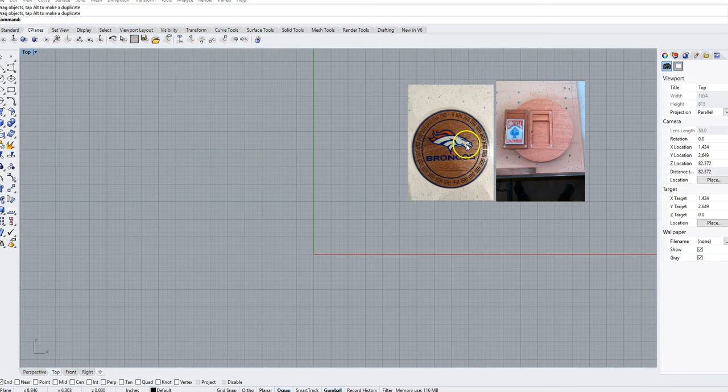Okay, cribbage board set up here. This is what we're going for. We want a diameter across the whole thing of 12 inches.

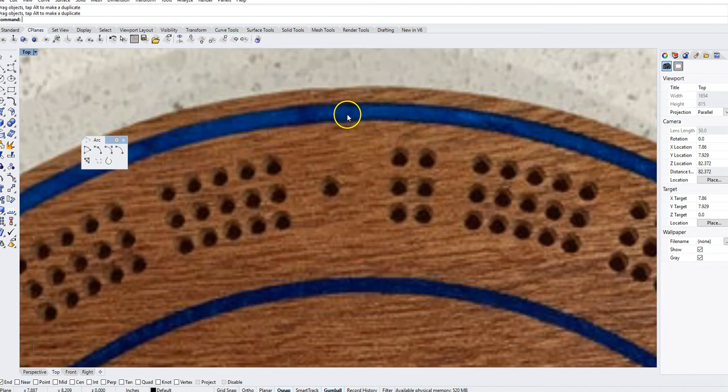As you zoom into this border here, we want to put about 3/8 of an inch, or 0.375 inches, between the edge and this first groove right there. We're going to make this groove a 1/4 inch. Then we're going to make from here to here 2 inches, and then another 1/4 inch. That will leave us the inside to do our design.

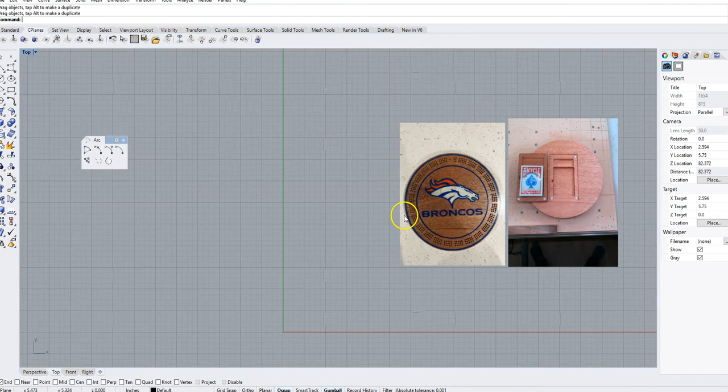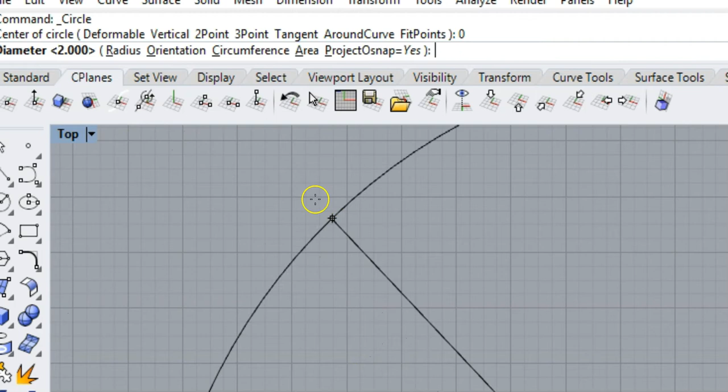So we're going to start with the outside circle first. We're going to grab our circle center radius option over here. It's going to ask you for the center of your circle, which I'm going to put at 0. So I'm going to type 0 in the command line and enter. Then my command line is asking me for my diameter. If yours is asking you for a radius, you can come into the command line and click diameter and change that, because I want a 12-inch diameter. 12, enter. Now I've got a 12-inch diameter circle.

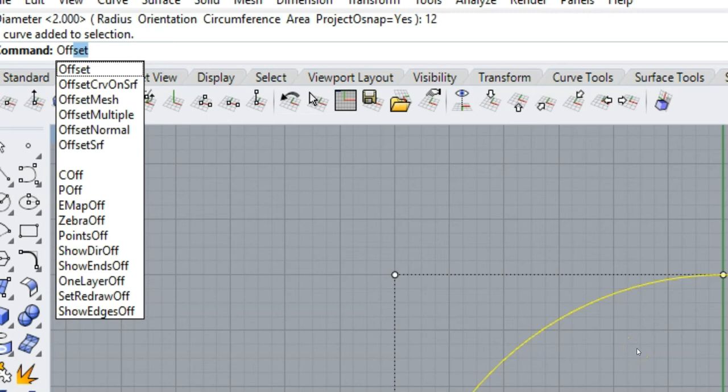I'm going to grab my circle, and in the command line I'm going to type in the command offset. Now I can click on the distance option, and I'm going to change that distance to 0.375 inches, or 3/8 of an inch. I can offset out, or I can offset in, so I'm going to offset in.

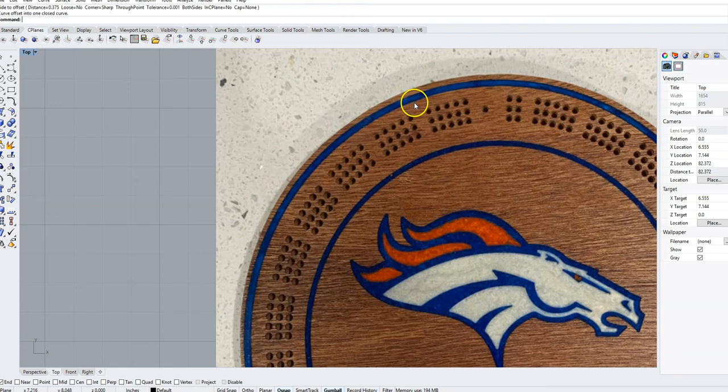So now we've established the outside edge of this blue strip right here. We're going to pull and offset in another 1/4 inch to establish the inside edge. Grab this, type in offset again, enter. I can just, in my command line, type in the distance, 0.25, enter. Now I can pull that in. And now I've established that line.

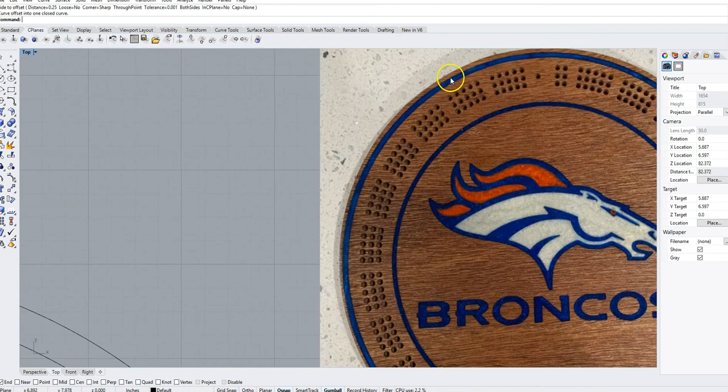So I'm going to now grab this outside one and offset again. This time I'm going to do 2 inches. And that looks maybe... yeah, that looks pretty good. So I'm going to offset in, click.

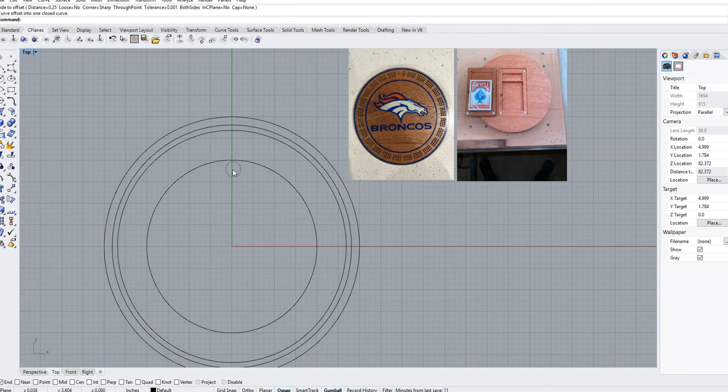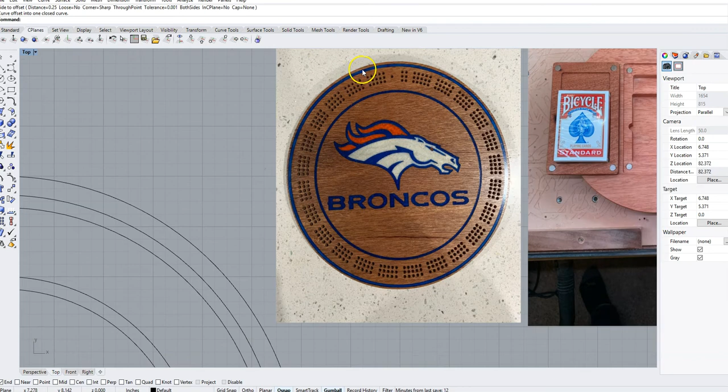And then my last one, I'm going to grab this inside circle, offset one more time, change my distance to a 1/4 inch, 0.25, enter. And I've got this groove for this border, this groove for this border. I've got my space on the inside here, and then I've got my space for my cribbage holes here.

So I'm going to save this file as cribbage board, April 10th update.